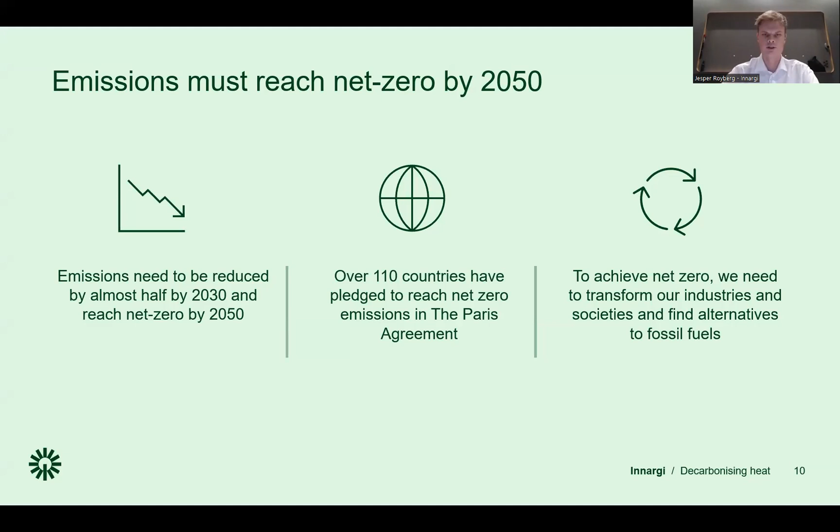You all do know about the Paris Agreement and how we must reduce our emissions drastically and rapidly, so I won't be speaking too much about that. But rather, I would like to speak to you about the key role that heating is going to play and can play. You all know about the aviation industry and our diets and how that's usually highlighted in the environmental discussions, but the heat that we use to heat our homes, our commercial buildings, and our industry plays just as big a role in the overall game.

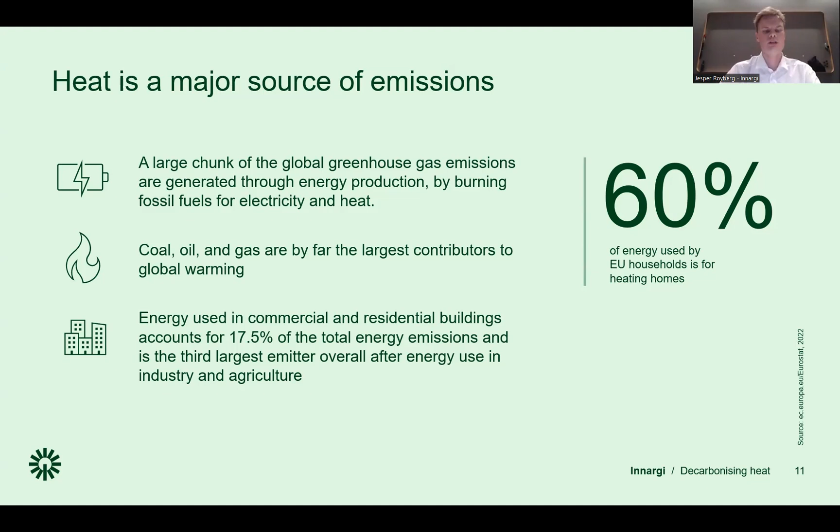For many years, we have relied on fossil fuels such as coal and oil and natural gas to heat our buildings, and more than 17% of our energy emissions stem from the consumption in our buildings. And a large chunk of that goes into heating our homes. Actually, more than half of the energy we use in our buildings is in our homes. So there's a major potential to decarbonize the heat that we use for heating our homes.

So being the sister countries that we are in Denmark and Sweden, our heat production is also quite similar. Around 1/4 or 1/5 of the heat that we use in Denmark and Sweden stems from waste incineration. So that is when we basically set fire to waste and generate heat from that. In many other countries, you don't do that process. Rather, you put it in landfills where it emits methane, for example. So it's not a bad thing per se that we incinerate the waste. It also generates this heat for our buildings.

But we also use a lot of biofuels, and the biofuels consist of 53% of the heat here in Denmark and 48% in Sweden. That's the latest numbers. And biofuels can come from a variety of sources, but it can, for example, be wood pellets and wood chips and straw. So 74% of the heat that we use in Denmark and Sweden comes from either waste or from biofuels.

There is an ongoing debate around the climate and the biodiversity friendliness of biofuels, and I won't be going into that today, but what we can look into rather is the massive use of gas and coal and oil we have in other European countries. You can see here that in countries like Germany and Poland, they still use a lot of natural gas for heat in buildings, and in Hungary they do use a lot of coal.

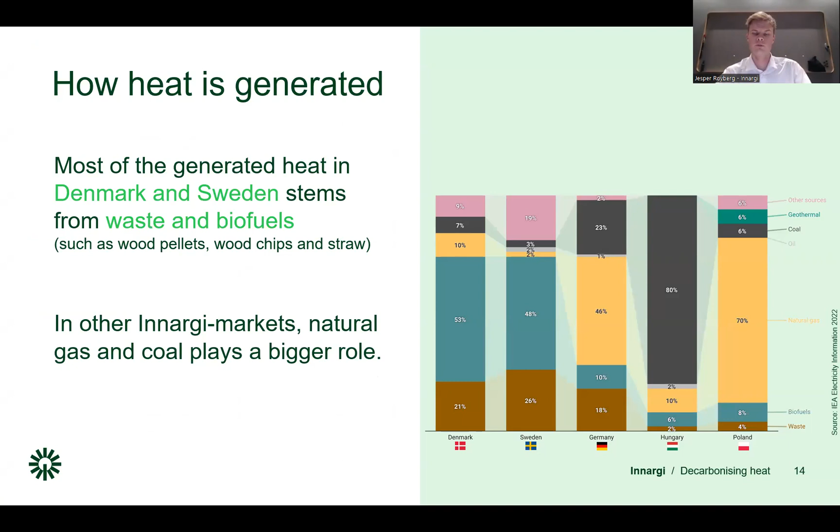So then there was this second trend out of the three trends that I've brought to you that I would like to touch upon. So I'm not entirely sure if it's the same case in Sweden, but ever since the Russian invasion of Ukraine and the suspension of gas purchases from Russia, there's been a resulting uncertainty in the supply chains that has got a lot of media attention here in Denmark around the rising cost of energy. It has especially hit hard on those with an individual heating solution where they have a small gas boiler close to the house that relies on gas, or it could also be oil.

And that is also the case in Germany and other European countries. So I imagine it's the same in Sweden, where the gas price has gone up and the energy markets more in general have seen a lot of volatility. So a second driver for us, but also for societies in general, is stability around the supply and the price of energy.

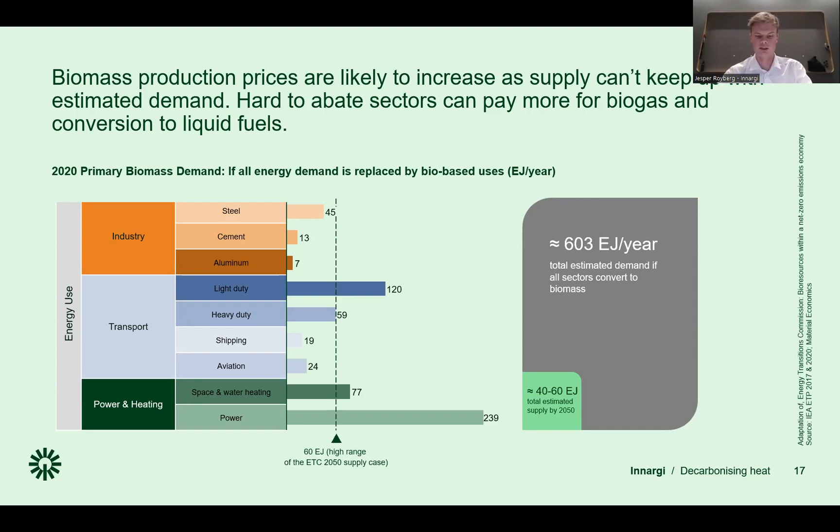And as you can see, if we are to convert aviation, for example, and shipping, then we've used almost all of our bio-based sources in the future. So it's very likely that biomass in the future will become a commodity that there's a competition around, and it's likely that the prices will go up, and it can be hard for heating companies to buy biomass.

So the third trend before coming to our technology is a rather brief one, and it's also a bit technical, but it's a quite important point I'd like to make in 2 or 3 slides. As you may remember from one of my previous slides, the way that we've traditionally produced heat here in Denmark and also in Sweden is through incineration. So that can be through waste, or it could be through biomass sources such as wood.

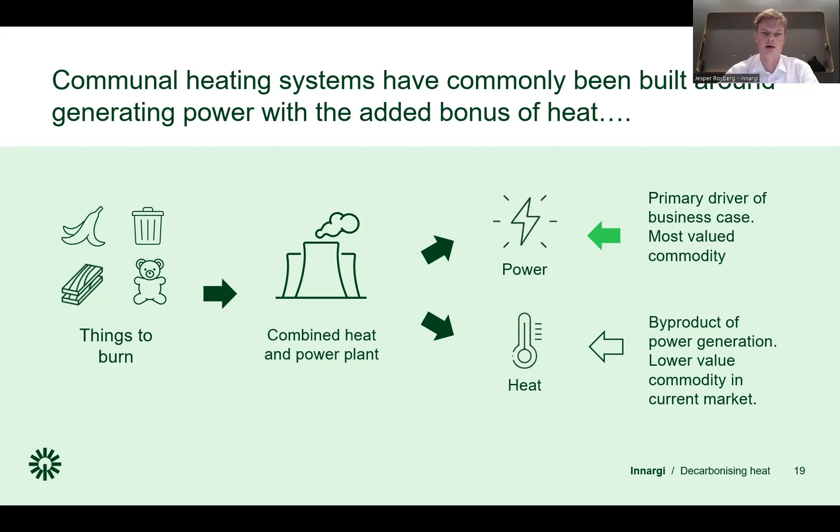And when you incinerate these sources, then you generate a lot of power. And that power can be sold on the electricity market. And that is pretty good business because you can make quite a lot of money from electricity. So in reality, the heat is just a byproduct from this power generation that you've done traditionally.

But in the future, as we gradually are going to rely less on incineration technologies, and when we're going to transition towards new sources of electricity, then we will not have the same amount of surplus heat that we do today from the power generation. So we will both have a need for a lot of power, and we will not generate any heat from a windmill spinning around or from solar panels absorbing the energy from the sun. So we need to have new technologies that are efficient in power consumption, that can generate clean and renewable heat. And that's obviously where geothermal comes into the picture.

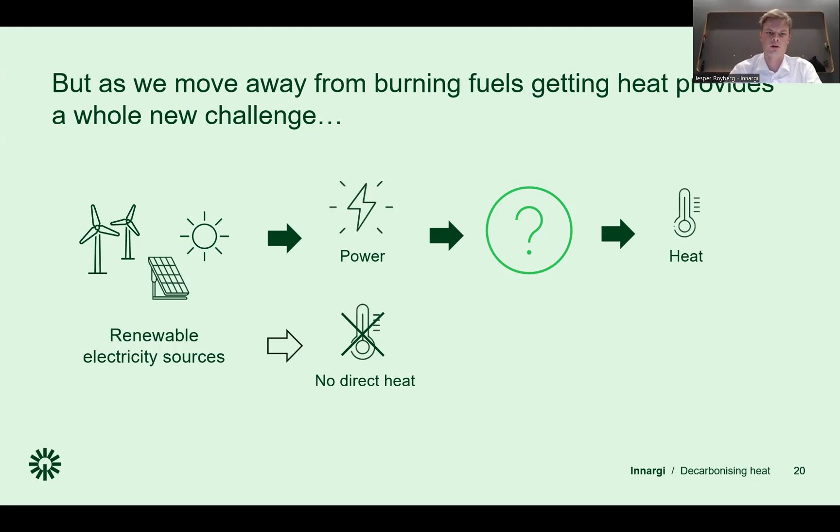So this was just to give you an overall introduction to the main trends that are driving both the transition we're going to see in Denmark and other European countries in Sweden, and also what is driving the need for geothermal across borders.

And since our technology depends on finding hot water a couple of kilometers below ground, then we need to know about the ground and the subsurface and how it looks. And therefore, we use these trucks. So during April, May, and June, these 4 vibro trucks were driving around Denmark to Aarhus, Holbæk, and Copenhagen, 3 cities that we hopefully will deliver heat to very soon.

And what they do is that they go for 10 to 20 meters, and then they come to a stop, send the vibrations down the ground, and then they are reflected in the subsurface back to the surface, where small microphones catch the vibrations. And from that, we can generate a map of the subsurface, so we know more about it and know where to drill for the heat.

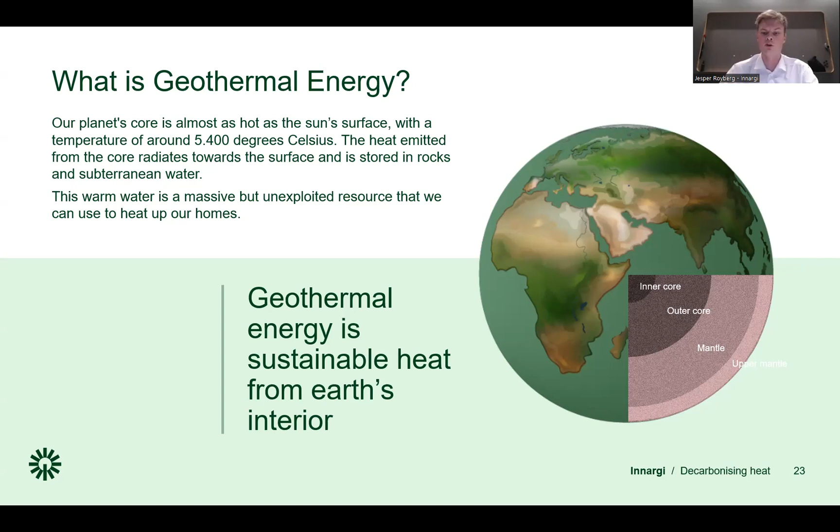So geothermal energy, as you all know, the core of the Earth is very, very hot, and it's actually more than 5,000 degrees warm. The heat from the core of the Earth radiates towards the surface, so around 1 kilometer below ground, you can find a temperature of 30 to 35 degrees Celsius. If you go 2 kilometers below ground, then it's around 60 to 65 degrees Celsius. And that means, in fact, that right below our feet is a tremendous source of heat that we can use to produce heat for our homes.

So the way our technology works is that we construct at least 2 wells. The first well is the orange one you can see to the left on the illustration right here, and that's called a production well. And the production well is used to pump up the warm water from the subsurface. When the warm water reaches the surface, it goes into our facility where we can extract the heat from the water before we pump it right down again through the injection well. That's the blue well to the right of the other well.

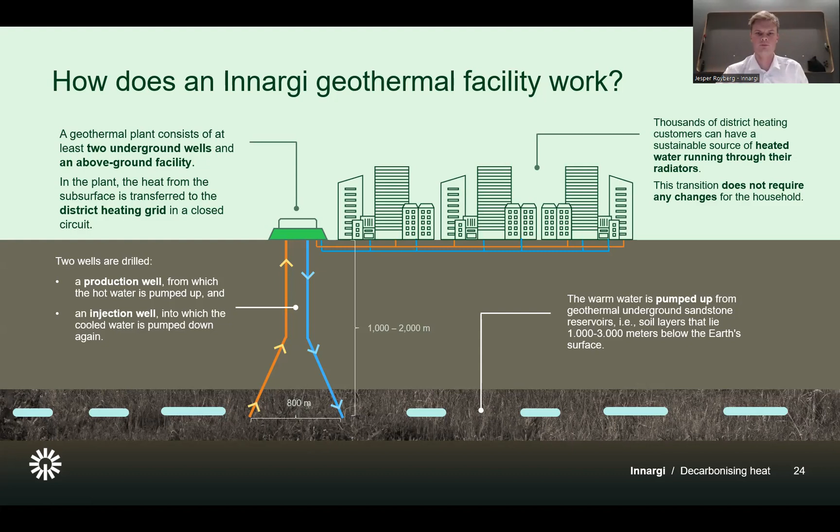And then the heat that we extract from this process, we can use to heat up the district heating water, and then we can heat up cities and homes instead of burning coal, for example. So why is it that this technology is a good idea? Well, there are 3 main benefits of geothermal energy. It's climate friendly, it's citizen friendly, and there's also a secure supply of heat for many years and even decades.

First of all, there's a quite obvious reason. It's good for the climate. Our geothermal operations do not have any emissions when in operation. We do use a bit of power to extract the heat. We need a pump to extract the water from the subsurface. But if that runs on green energy, for example windmills or hydro, then we are emissions-free, in fact.

And also, this is not just something that makes an impact locally. We can actually deploy this at scale as well. And 20% of Europe's heat in the future can come from geothermal. And we are strong believers that we can make an impact through this. And in the city of Aarhus, where we are doing our first project, we will in fact deliver 20% of the future heat in Aarhus by 2030.

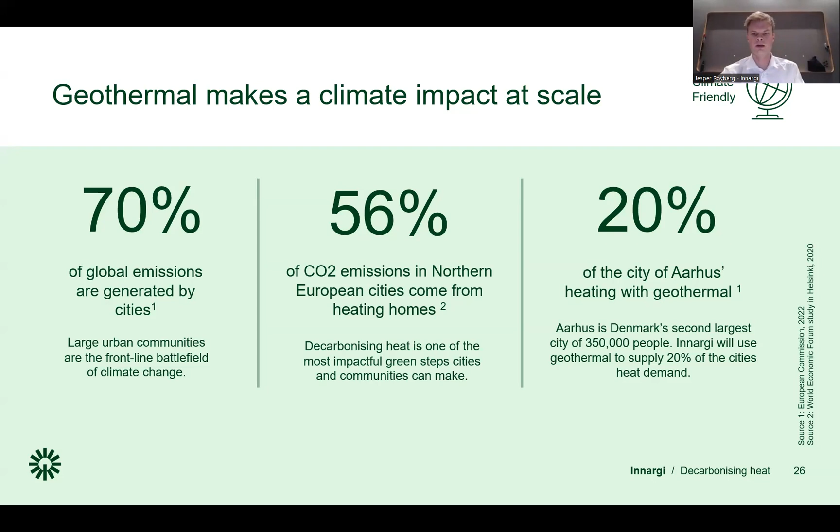Then I also stated that it's friendly towards citizens. And one of the reasons is that our facility is quite small. We do in fact only need 400 or 500 square meters on the surface, and inside the facility you have access to the heat pumps, and the wells themselves don't take up much space.

Also, there are no noise or any emissions from the facility, so the surrounding environment around the facility is not impacted by our operations in any way. And as a matter of fact, as you can see to your right on the illustrations right here, we can integrate the facilities into urban areas. Obviously, you can do a greening of the exterior, as the first drawing shows, so it looks pretty and people don't mind being neighbors to one of our facilities.

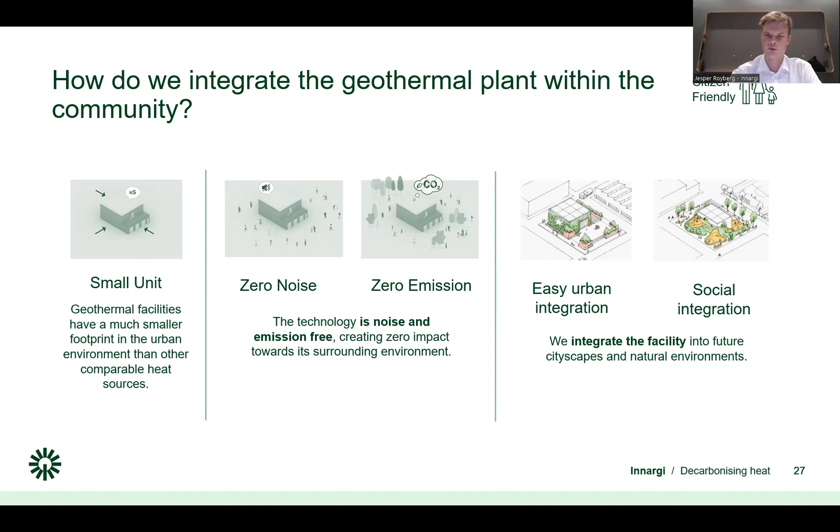But you can also go even further and do recreational stuff around it. So you can have a playground or a climbing wall, a basketball court, or just a park for people to thrive in. So clearly, there's a discussion about who finances these recreational activities around it, but you could do some quite nice facilities in this way.

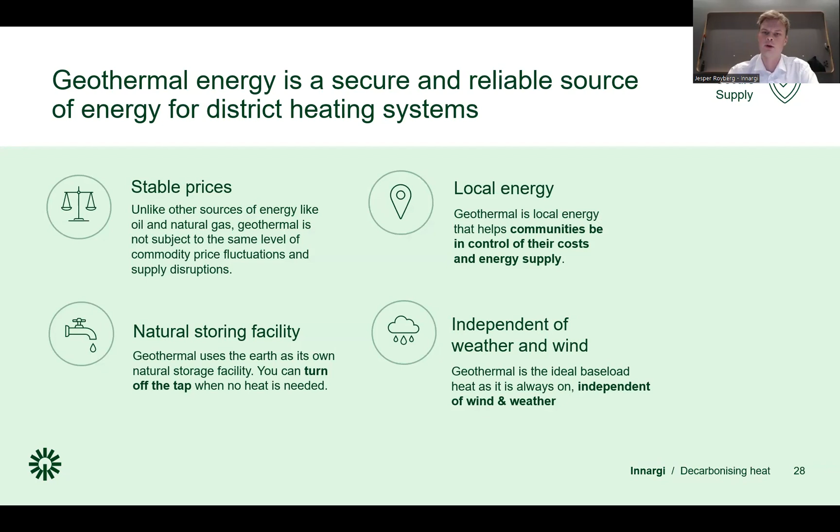And then lastly, I also stated that there's a stable supply of heat for many years. Geothermal is inherently local, so given that you have a windmill or another power source close by, you can produce all the heat and energy in the vicinity of a square kilometer. So you don't need import from other countries or anything like that. Also, we don't rely on the wind to blow or the sun to shine, so it's also a very stable energy source, and you also have quite stable prices for the 30 years that we are operational for, which is also a good thing towards citizens.

So lastly, given the political nature of my audience, I've brought a few points about geothermal potential for Europe that I would also like to touch upon briefly, and also touch a bit about Sweden here. So apart from the need of a favorable subsurface that we obviously need to do geothermal, one condition that needs to be in place for us is somewhere to send the heat. It does not matter if we can extract a lot of heat from the ground and then we don't have anywhere to send it. So we need a system that can take the heat that we produce. And obviously the best system for that is district heating, or fjärrvärme.

But there is a huge potential to expand district heating even further in Europe, in countries like Germany, the Netherlands, northern France, the United Kingdom, and also other places. For example, here in Denmark, we have a large urban area north of Copenhagen that relied on gas in the past that we have started to convert to district heating. And I'm sure that's also the case for many areas in Sweden. When the energy crisis happened last year and the heating bills exploded for many people, the Danish government mandated that every municipality needed to communicate to its citizens whether or not they could be included in the district heating system. And we do believe that's a very good thing.

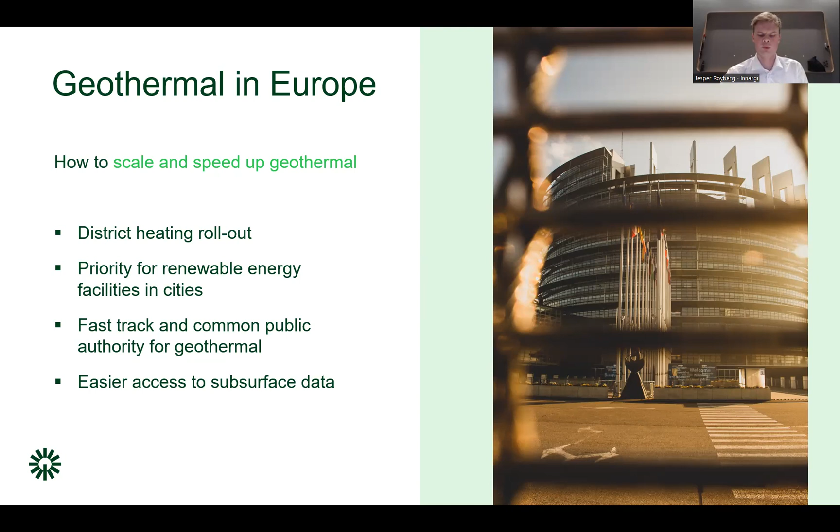And then lastly, there's been a lot of exploration for gas and oil in Europe in the 70s, 80s, 90s, and 2000s. And the subsurface of Europe has been mapped many times, or in many areas at least. And a lot of that data is not publicly available. We think that's a shame because it delays the processes for the public good quite a bit, and it makes it more expensive. I'm not necessarily arguing that all data that the private companies have should be made publicly available right away, but we could look into making past data available that does not have a lot of commercial value anymore. It should not be publicly available right away, I believe, because that will probably limit willingness to invest, but there's room for improvement here also, I think.

But then lastly, what about Sweden? Sweden has one very successful geothermal plant that's in Lund in Skåne. It has been operational ever since the 1980s, and it delivers a big chunk of the annual heat in Lund. In southern Sweden, in Skåne and in Blekinge especially, you will find a subsurface that is quite similar to what most of Denmark has. So the type of geothermal we do is quite viable in southern Sweden, and there could also be a potential in cities like Malmö, Helsingborg, and Lund, obviously.

If we look at the rest of Sweden, then it's a bit more tricky. Your pleasant country rests on crystalline bedrock, so that's rock like granite, for example. And there are a lot of good things about the Swedish geology. You have some amazing mountains, and we don't here in Denmark, which is quite boring. But it does make geothermal a bit more tricky because you don't have these sand layers that we are usually targeting.

So it's not impossible to do geothermal in the rest of Sweden, but it is a bit more challenging because of the subsurface. It's a bit more risky and a bit more expensive. It is possible to do it north of Skåne and Blekinge, but it's more expensive and a bit more risky because you are going into granite, and then you might have to do fracking, which is not always popular, but it can be a solution to do geothermal. And there are other geothermal plants operational in Sweden right now, but I just wanted to highlight this one in Lund because it's quite similar to what we do in Denmark.

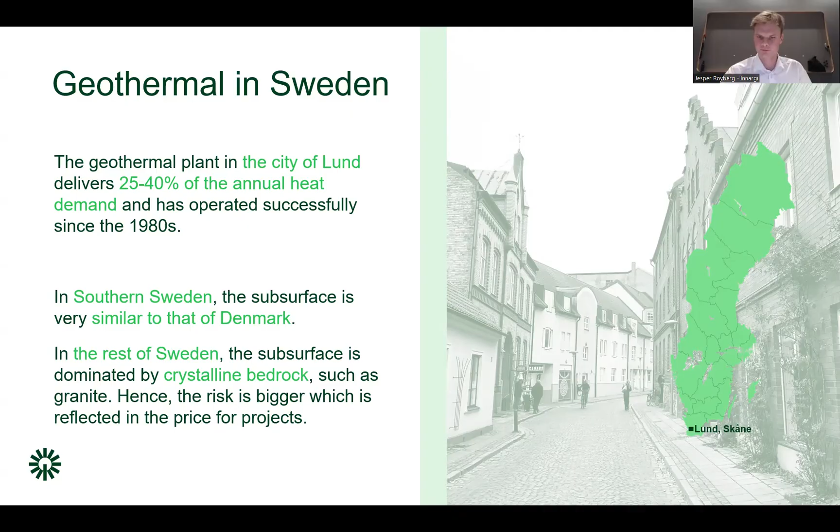So that was my 30 minutes and my presentation around geothermal, both the challenges we face on a macro scale, the challenges we face as a company, but also the very big opportunities that we see in decarbonizing heat in Denmark, in Sweden, and more generally in Europe.